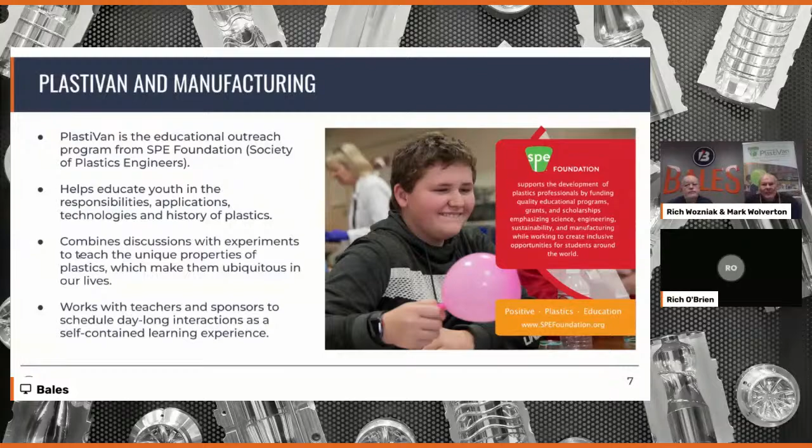Next, now we're just going to jump into some career paths in plastic manufacturing and in manufacturing in general, touching base on a few different avenues. Mark and I were going to jump back and forth, throwing our 2 cents into just a handful of careers and opportunities that are out there. These are just going to be some subcategories. You can really dive deep into some of the industries or career paths and form your own path. It's an excellent opportunity to get into.

Next, so starting out, the entrepreneur. So how do we come up with a spoon like that? Well, somebody's got an idea. They say, I want to make a device. Whether that device would be a spoon, a clip, it might even be a water bottle and a water bottle closure. It could be a container for hand lotion or personal care devices or products. It could even be something simple, or more complicated, like an air pump. So all of these parts need some concept, and the entrepreneur is typically the person who is driving the idea behind it.

So you need people to balance out. If you think of a device as a table that has legs which support the flat surface of the table, you want that table to be level, not tipped or poor or unbalanced and wobbling.

If you think of the 4 legs of that table as design, materials, manufacturing, and mold, in many cases of a plastic part you need skills in all those areas to balance it. Not all those skills are available in any one person, so typically it requires a team. When you build your career as an entrepreneur, you put the money behind it, you believe in it, and you make it work. But you need people to help in these other areas of the career path - people who understand management, how to get things done and get people to do things, and operators who understand how the machines and processes work and how to adjust them.

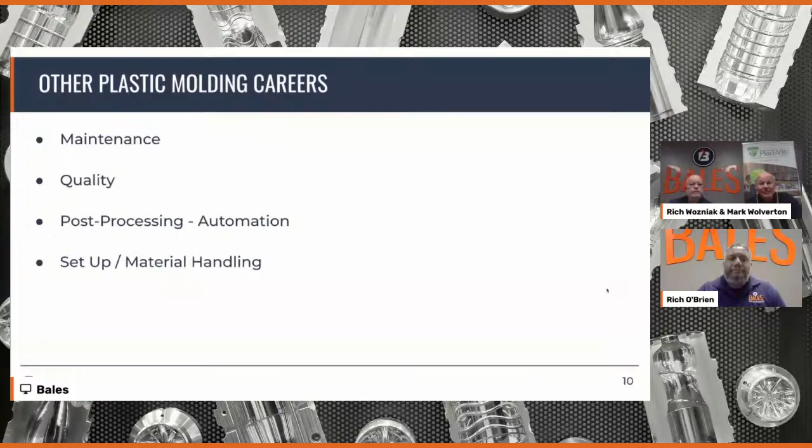Plastivan is very heavily invested in the manufacturing and science arenas. It's what we do. What we're trying to do is encourage these upcoming generations to look at careers in STEM, in science, technology, engineering, and manufacturing, and mathematics, as well as arts. It all ties in together.

We have a tremendous emerging workforce coming out. They're interested, they want to do things. They don't necessarily want to sit around all day playing on their phones. And a lot of people don't understand exactly how this ties in.

In terms of some of the outreach activities, we've been working as Plastivan with an outreach group in the Detroit inner city area called Ecotek Lab, which is... what's the word I'm looking for? It requires an audition, if you will, to be part of the lab, and it requires real investment on the part of the youth in order to prepare.

And they're doing some science that is, even to me as a practicing engineer, just unbelievable science, technology, and manufacturing development work for what teenagers would be pulling out today.

We're extending this also into a series of after-school STEM clubs, both in Detroit and Lansing, as well as in Dallas, Texas, working with the Girl Scouts down there. So manufacturing, plastics, and beyond-plastics manufacturing all tie together.

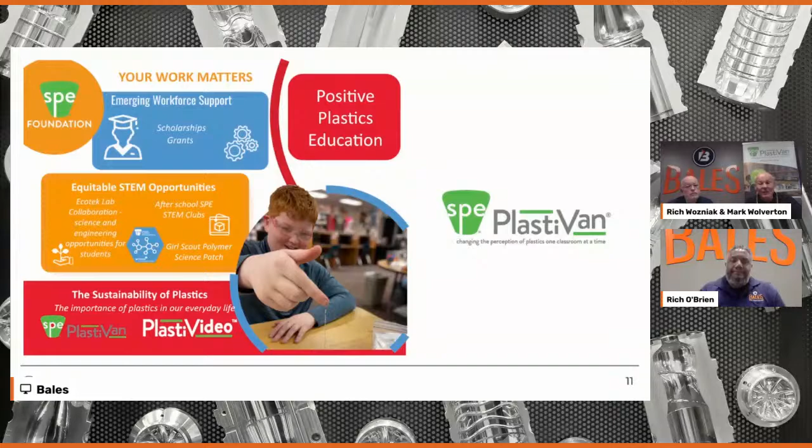In the next slide, we talk about some of the parts and processes that we're making. There are any number of processes, or 6, 7 specific ones we can think about. We can talk about thermoforming, where we would take and reshape a form by heating it and manipulating it into the spoon.

That led to the technology of thermoforming today. We could talk about injection molding, where we could make spoons, forks, in high capacity, high cavity molds. It's one of the ways we make the caps for our water bottles today. We can have extrusion.

So if anybody's ever handled any wire, or looked at any kind of conduit or other hollow profile, might be a long hollow profile, it might be made by extrusion.

If you're looking at making the bottle part of our water bottle, you're looking at a blow molding process, and there's a couple different ways to make that. If you look down below a car, there's a boot that covers the constant velocity joint, the CV joint. That's made by blow molding.

Hollow parts can also be made by rotomolding. So if anybody has a canoe or a kayak, or big pieces, or even one that was really cool - if you've taken your kids to the bowling alley and they have the dragon set up for the youth where the kid loads the bowling ball into the top and pushes it over, that's made by rotomolding.

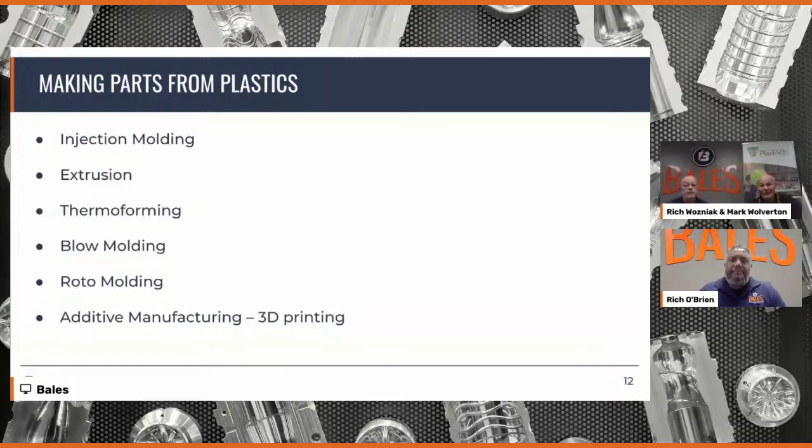So what we can do is talk a little bit about how would we build a career in plastics. You say, okay, these opportunities are out there, but I can go out and get a job, and a job is a job. A career is something that you can enjoy doing, and if you enjoy what you're doing, you never work a day in your life. That's perfect. Let's move on to that next slide.

I buried the lead a little bit on this slide. Okay, okay, that's all right, we'll let you slide. I mean, you showed me - look, my balloon is still intact with the stick in it. This is crazy stuff, but Mark knows his stuff.

So to be successful in manufacturing, you want to make something. But to really contribute as part of the team and pull it around, one, you've got to be a little bit of a team player. That's not necessarily means that you can't be a lone wolf. There's a need for those too, but you're going to be a lone wolf as part of a team. You're going to have a skill set that somebody wants to take advantage of in order to get the device to work.

You need to be able to think critically. If I'm looking at a part, I don't care whether it's a closure or a skewer or a bead or car interior parts, you need to look at it and think through the process. You don't have to be a degreed engineer to do this, or a scientist. You just need to be able to say, how did this happen and how does it work?

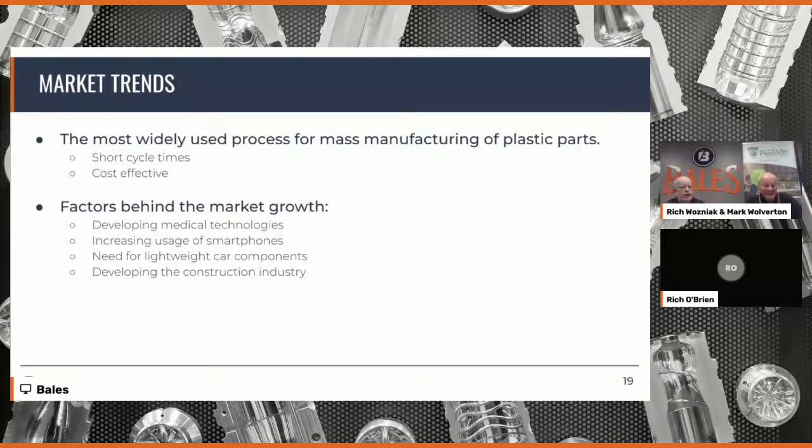But that's right, and it's plastic. If it's not plastic, it's manufacturing, and that's what's key. Let's jump to that almost last slide here.

What we're looking at is applications, like we talked about earlier - making those high volume parts. You've got an 80 cavity tool, 100 cavity tool, whatever it may be. I'm probably misquoting the cavitation - if you do the math I might have, okay, that's not an even number, and somebody's going to pick at that, but that's okay, it is what it is. But the key is, okay, you've got to make all those parts. Now they're coming off, you pick them off a robot, they're on a runner. Okay, how do you get them off the runner? So now you've got all different kinds of applications.

Food and beverage, like you look at the blow molding bottles - you've got our bottles here. Cheers to those who are holding a vodka bottle. I mean, it is what it is. I mean, sorry Mark, but those are made out of plastic. So I do know what I put in mine. I thought I smelled something, but no, it's just - no. But it's just those things. In everyday life, you just have to look around, take a step back, and everything.

Medical, consumer products, automotive - the cup holders, and electronics. Hey, one of the largest plastic molders in the world makes those little square blocks that people build stuff with.

It is what it is—just look at all the different colors and all the processes that go through that, so you don't have splay or other problems in your process. It all takes people, and people are important to manufacturing.

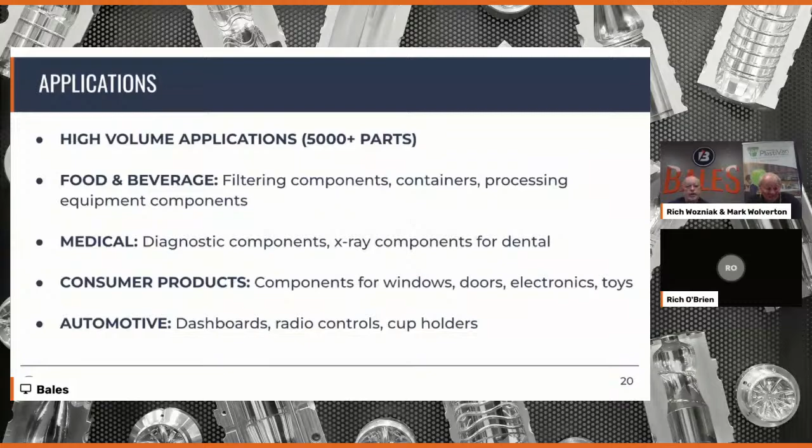So when we're talking about manufacturing, we're talking about devices, design, materials, processes. Inside that area of process we're talking about a couple of different trees: the process technology itself—injection molding, extrusion, blow molding, additive manufacturing—but also subsets where these skills and understanding how they tie together and stand alone are important: mold setup, plastics extrusion, the molding process itself, cooling, getting the parts out, post processing, parts handling. We talk about runners and some other attributes.

But so many high volume applications today—there are billions, with a B, billions of bottles and closures made in the United States every day for water and all the other sports beverages we drink, as well as carbonated beverages. Billions. All of these are very high speed processes.

When I was in the factories working with my clients, the molds would open on 7 to 12-second cycles, and it would be a cascade of parts coming off the mold. There was a molder making parts on a compression molding system—a little different technology. It sounded like a 50 caliber machine gun going off. Sure, it's loud, but they were coming off at that rate—hundreds of parts per second coming off that machine.

Every day is different. Building the anodes, because you have all sorts of different aspects you have to brainstorm, and wires go in different spots, and you have to fabricate frames for them. In manufacturing you don't realize what the parts that come in are - what you deal with every day. They could be for a car, they could be for a grocery store, they could be like a little pen.

We deal with those things in manufacturing, and this is always going to be part of it - it's part of America, USA. Manufacturing is part of our really big, huge industry in this country, and being part of that, it's just going to keep on growing and growing. I like manufacturing - I'm pretty new to it, but I'm just learning about it every day.

It's really interesting, I think it's very challenging, especially at our plant here. We got young kids coming in learning how to do nickel, learning how to do polish, learning how to do chrome. I think it's very challenging, and we are a small family business here, so that's a plus too - everybody knows everybody. It opens a lot of avenues - you can go into chemistry, chrome plating, nickel plating, polishing - a lot of different avenues you can go down.